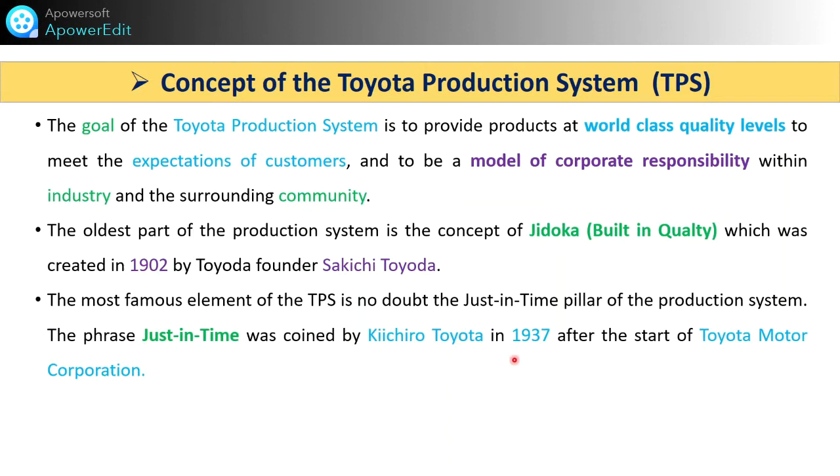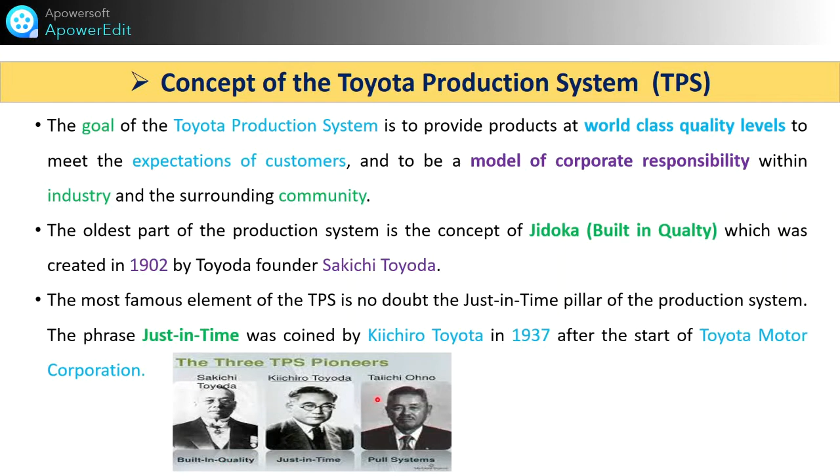The most famous element of TPS is no doubt the just-in-time pillar of the production system. The phrase just-in-time was coined by Kiichiro Toyoda in 1937 after the start of Toyota Motor Corporation. These are pictures of Sakichi Toyoda and Kiichiro Toyoda, who developed just-in-time, and built-in quality means Jidoka. And after that, Taiichi Ohno and the pull system. Hence, we'll learn the concept of TPS, the Toyota Production System.

This is the image of the house with 2 pillars. The 2 pillars are just-in-time and Jidoka. These are the main 2 pillars of TPS. What is the aim of these two? The goal is the highest quality, lowest cost and shortest lead time. In just-in-time, continuous flow, takt time and pull system, you must learn. Watch the videos on just-in-time.

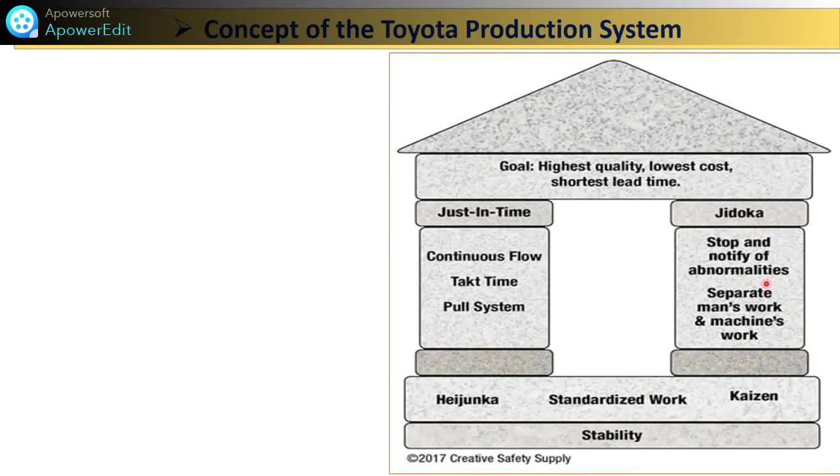Under Jidoka, stop and notify abnormalities, and separate man's work and machine work. So friends, here also are techniques like Kaizen, Heijunka, and standardized work that will give stability to your industry like Toyota.

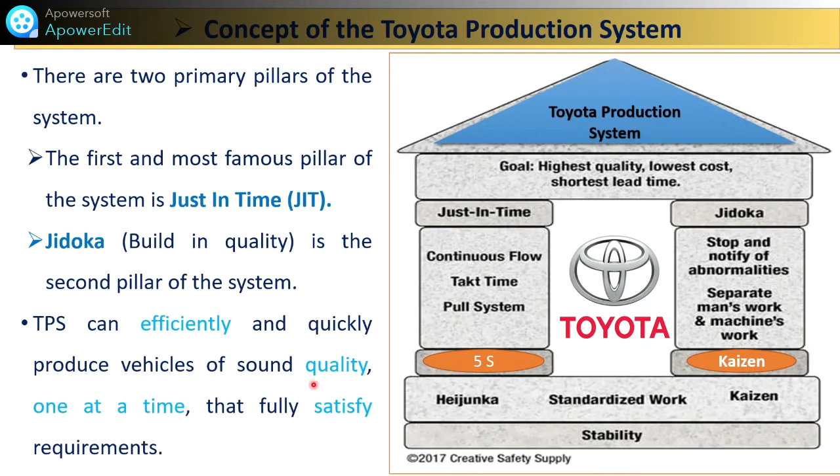So there are 2 primary pillars of the system. The first, most famous pillar of the system is just-in-time, JIT; Jidoka, built-in quality, is the second pillar. TPS can efficiently and quickly produce vehicles of sound quality one at a time that fully satisfy requirements. So we'll start with Jidoka.

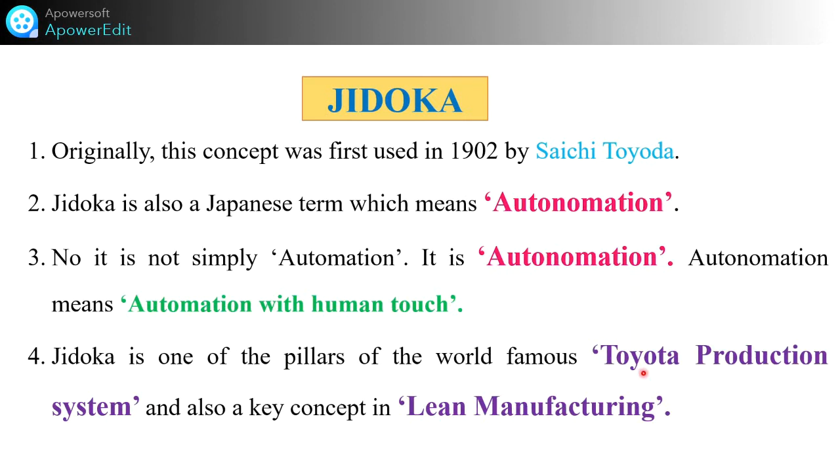Jidoka originally was used in 1902 by Sakichi Toyoda. Jidoka is a Japanese term which means autonomation. No, it is not simply automation. It means automation with a human touch, or automation with a human mind. Jidoka is one of the pillars of the world-famous Toyota Production System and also a key concept in lean manufacturing.

So friends, what is Jidoka? Toyota used this term to indicate that the system needs to be automated to highlight and attract attention to any deviation or defects originating in the production process. Thus, the machines were automated to identify and stop immediately when a defect or deviation occurs in the product or part of the product.

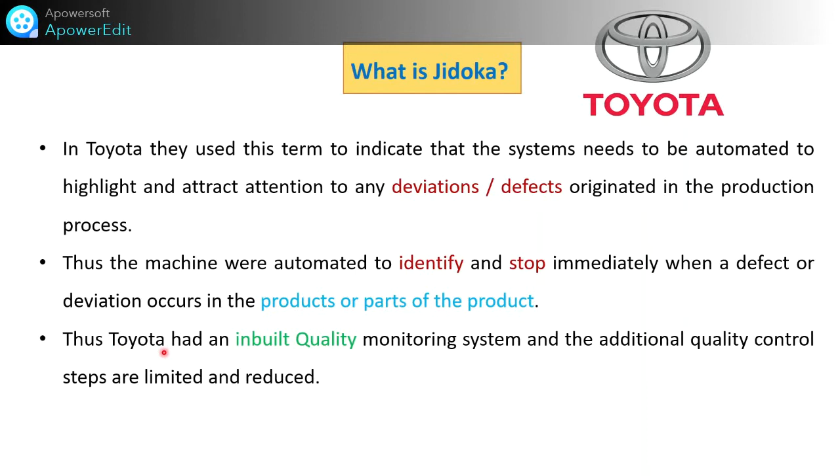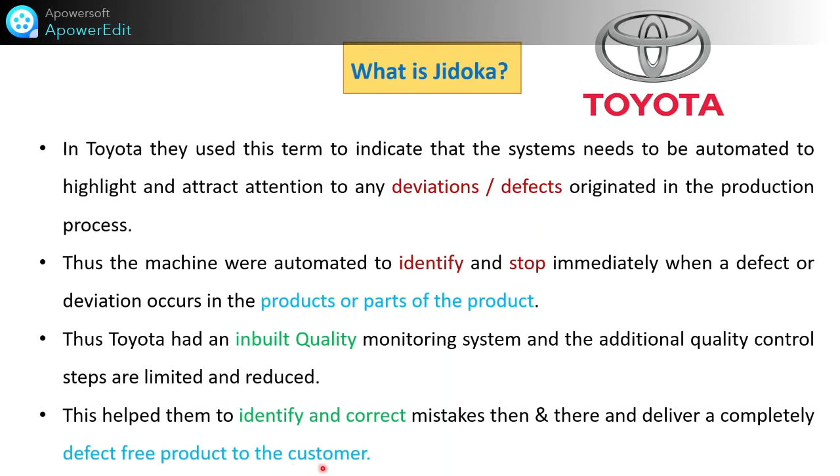Thus, Toyota had inbuilt quality, meaning monitoring the system, and additional quality control steps in between the process are limited and reduced. So this helps them to identify and correct mistakes then and there and deliver completely defect-free products to the customer. That is the main purpose they have achieved through this system. So Jidoka is one of the two pillars of TPS, along with just-in-time.

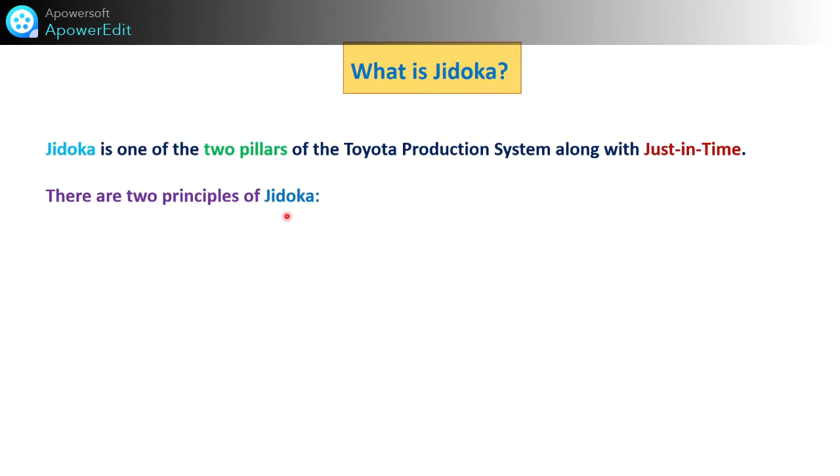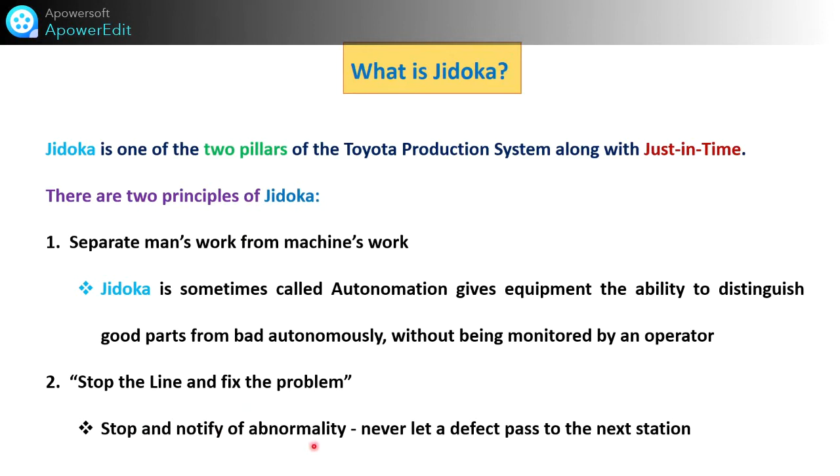There are two principles of Jidoka. The basic principle: separate man's work from machine work. Jidoka, sometimes called autonomation, gives equipment the ability to distinguish good parts and bad autonomously without being monitored by an operator. That is separating man's work from machine work. What will happen then? He will stop the line and fix the problem. Stop and notify abnormality. Never let the defect pass to the next station.

So there are four major steps for developing this type of Jidoka. First is minimize the manual labor. Manual labor simply means that all work is being done by hand. This makes sense only when the labor costs are cheap and/or the manual work can be done very quickly. That is not like this. We have to minimize the manual labor work.

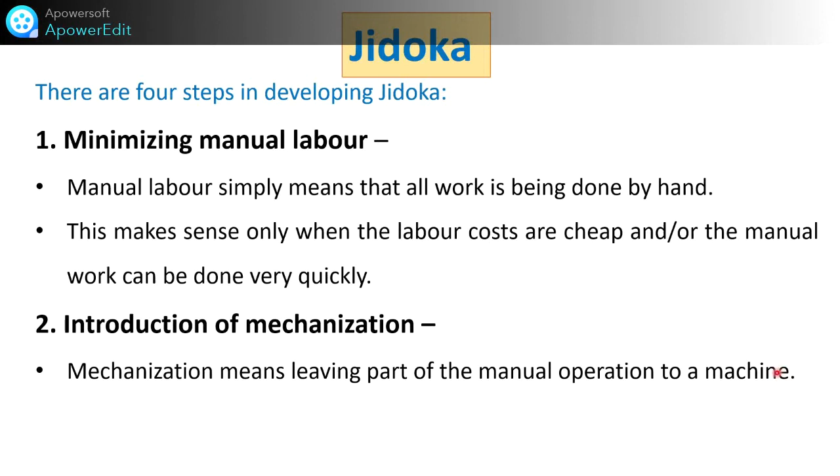After that, we have the introduction of mechanization. Mechanization means leaving part of the manual operation to a machine. The work is shared between operator and machine. So we have to introduce the mechanization.

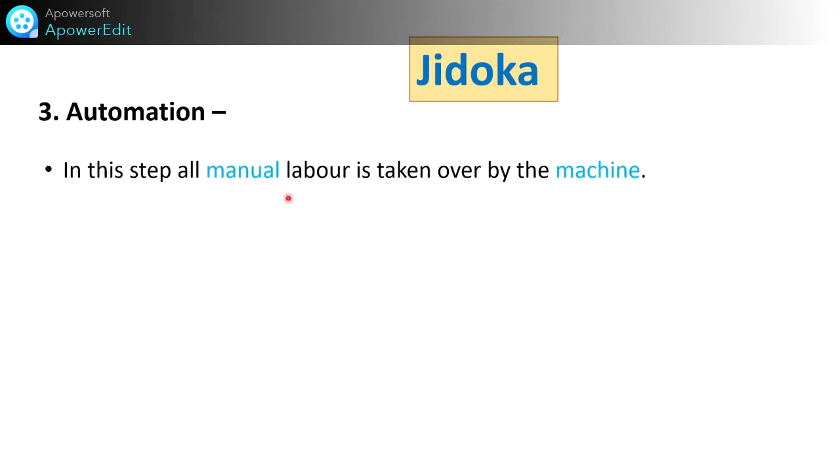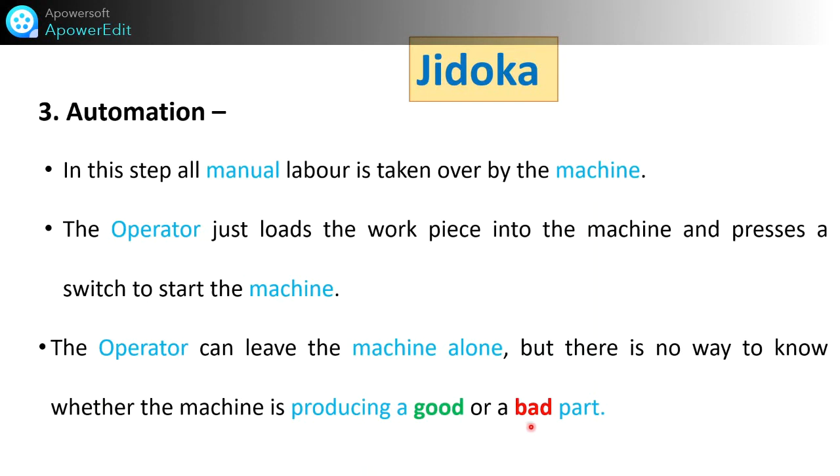The next step, third step, is automation. In this step, all manual labor is taken over by the machine. The operator just loads the workpiece into the machine and presses a switch to start the machine. The machine is started now. So the operator can leave the machine alone, but there is no way to know whether the machine is producing a good or a bad part. That is the problem. So to take over this problem, the fourth one: Jidoka, autonomation.

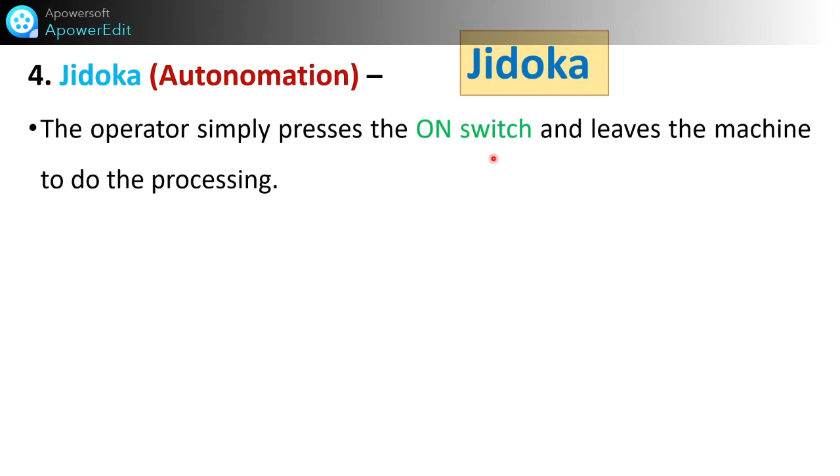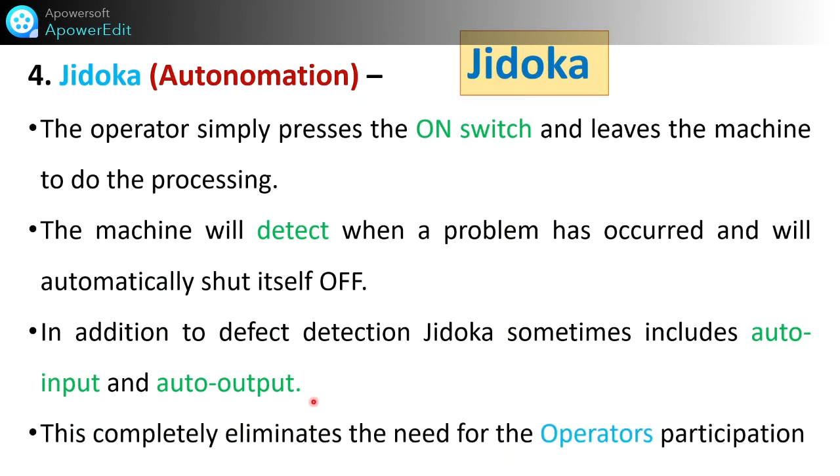Under this, the operator simply presses the on switch and leaves the machine to do the processing. The machine will detect when a problem has occurred and will automatically shut itself off when a defect or deviation in the product occurs. In addition to defect detection, Jidoka sometimes includes auto input and auto output also. So this completely eliminates the need for operator participation, and also increases the built-in quality.

So friends, what is Jidoka then? Jidoka is the automatic detection of problems or defects at an early stage, proceeding with the production only after resolving the problem at its root cause. So that is important in Jidoka. How it will happen, I'll show you with an example.

See these pictures. This is manual feeding by the operator to this machine. They are feeding this for the process. Then the next step is automation, mechanization. Here automatic feeding is there, input automatic, output automatic. The operator watches the machine cycle. But what will happen? It will not detect the defective parts.

So the next, last step, Jidoka. Automatic feeding is there, automatic output is there. After starting the machine, here is an andon light which will represent the defective part. If a defective part occurs, the light will glow. So we have to develop self-monitoring machines to increase the productivity also.

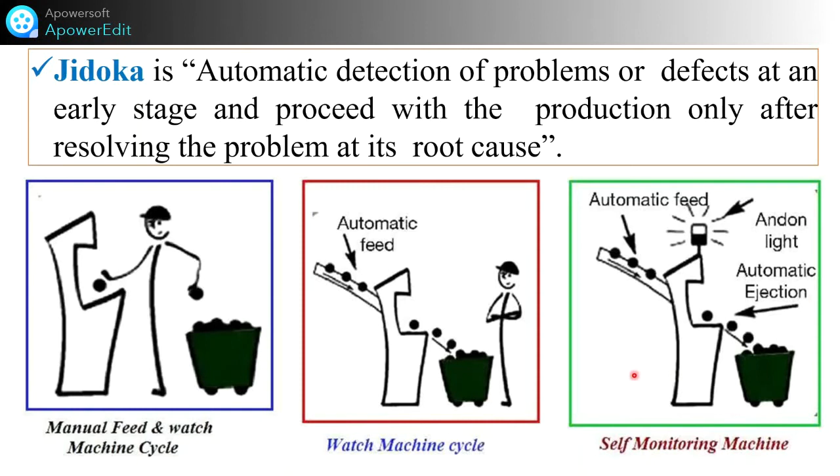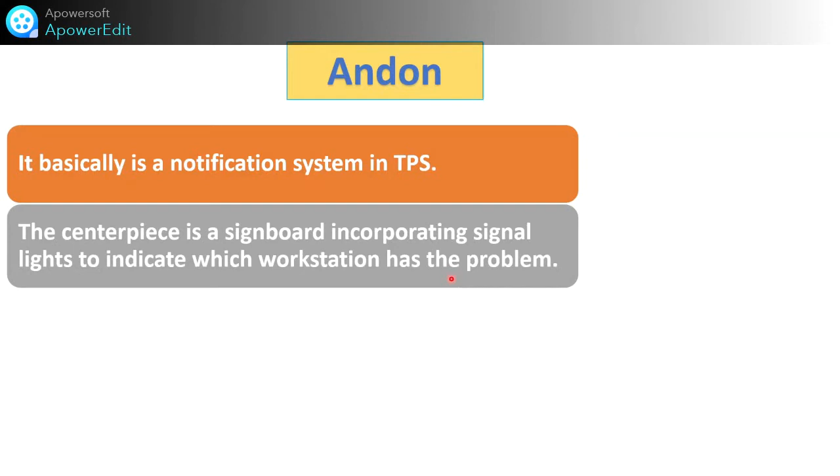So friends, here you heard the word andon. It is basically a notification system in TPS. The centerpiece is a signboard incorporating signal lights to indicate which workstation has a problem. Any problem in the workstation, or a defective part, is also represented by andon. So this is the picture of the andon.

You can stop the process manually. The alert can be activated manually by a worker using the pull cord or the button, or may be activated automatically by the production equipment itself. See, this is the use in industry, a picture of industry, and it was based on the pull system, where the problem can be notified as it happens, and then it can be corrected immediately.

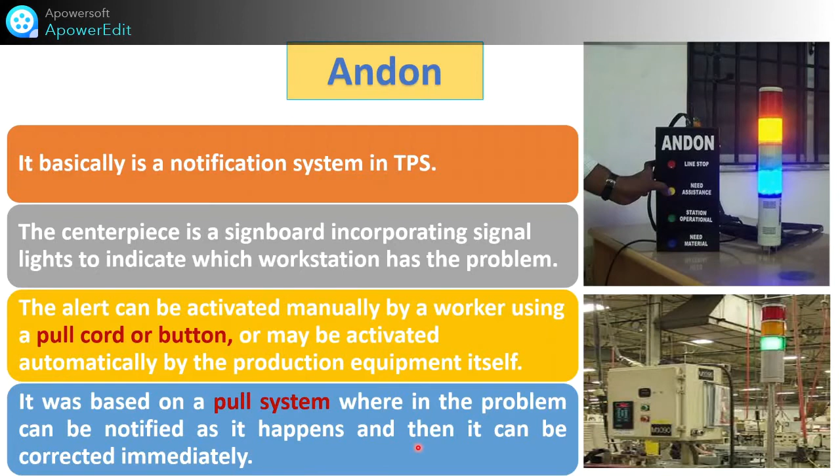Friends, reflection spot for this. Just pause the video for 5 minutes and try to write the answer, what you understood from the previous part of the video. Write down what you understood on one plain paper. Pause for 5 minutes. Okay friends, now we can play the next part of the video.

The remaining part is a very interesting part. Here, Jidoka using state-of-the-art AI. Artificial intelligence nowadays is an emerging trend, and you have a bright future opportunity in this trend also. So the Jidoka software platform and hardware platform developed by this company: they form one software platform called Kompass, and that Kompass is used to do all the records. The reference has been taken from this website. You can also go through the website.

Real-time decision making leveraging state-of-the-art AI, live monitoring of all the images, an E2E system for visual defect inspection. I will give you details in a coming video. Quality reports develop automatically, customized to organization needs, with downstream and upstream integration of applications such as ERP and other IoT platforms. You can also connect, with cutting-edge analytics and seamless integration with the hardware elements.

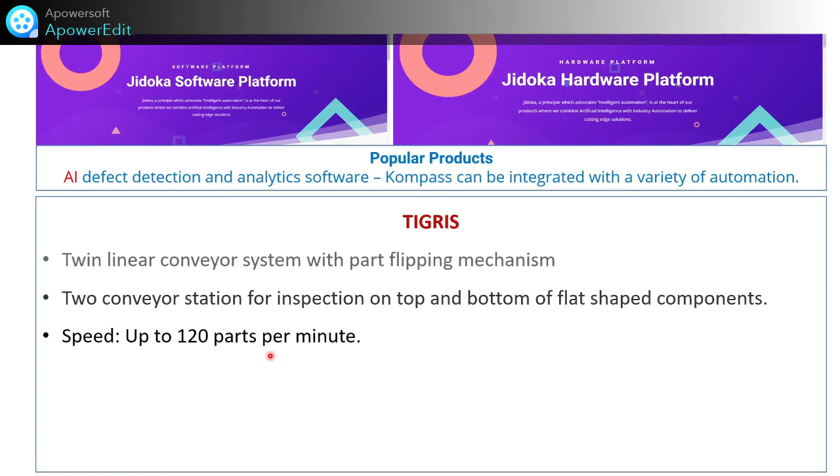How will it work? It works with a twin linear conveyor system with a part flipping mechanism for the product. Two conveyor stations for inspection on top and bottom, and flat-shaped components also. The speed is up to 120 parts per minute for one machine. The size of the machine is 1.6 meter length, 0.75 meter width, 1.8 meter height.

The number of cameras is 2 to 6 depending on the component's geometry and regions for inspection. Tigris can be integrated with any part feeding automation such as a bowl feeder.

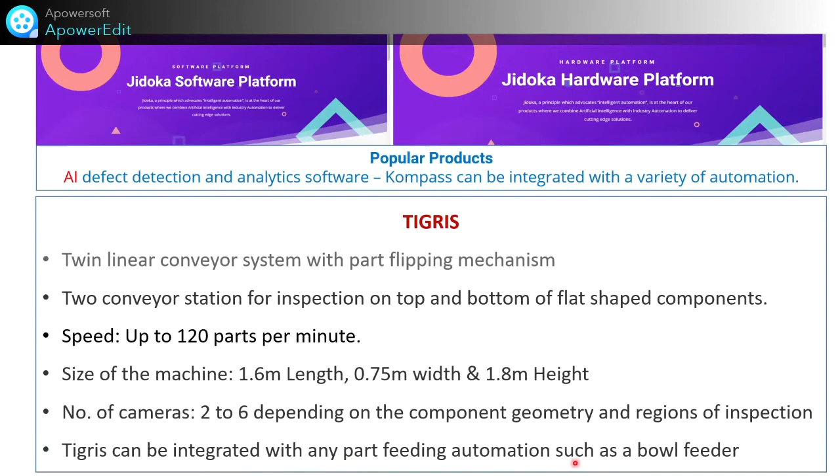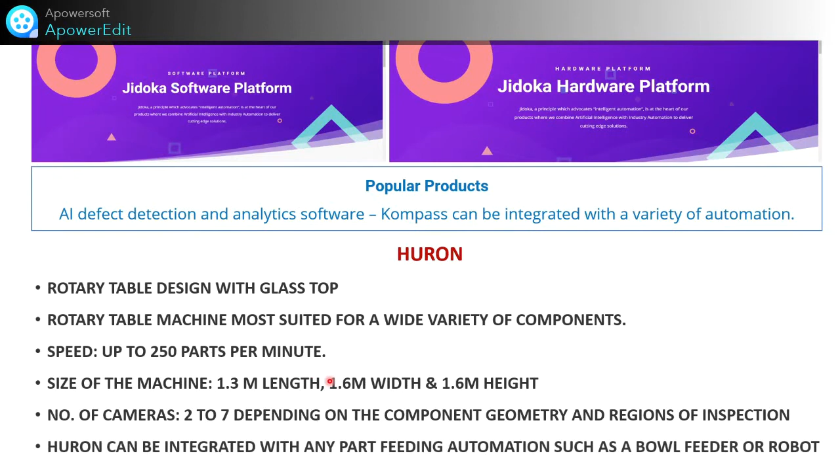See, one other product for AI, Huron. Huron is a rotary table designed with a glass top. The rotary table machine is most suited for a wide variety of components. And here the speed is given to you, size, number of cameras. Huron can be integrated with any part feeding automation such as a bowl feeder or robot. See, we'll watch this video to clear your idea.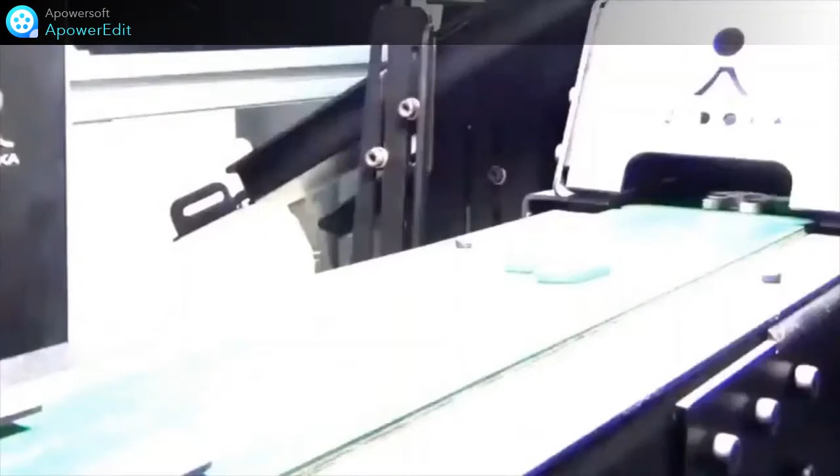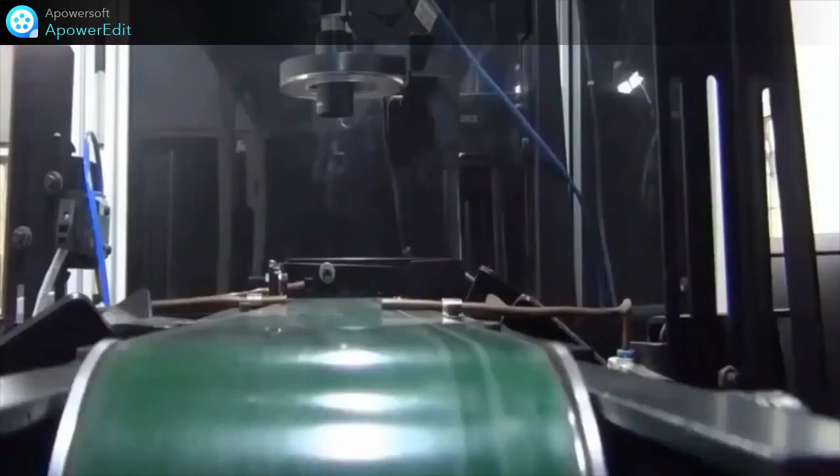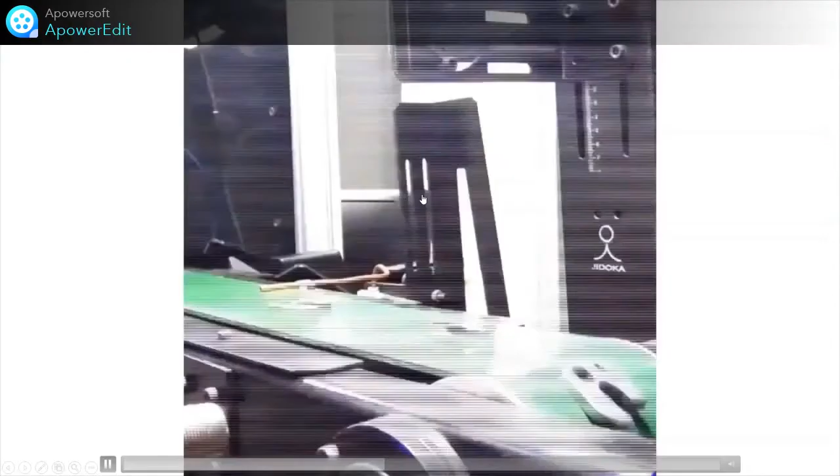See, these are the products which are kept on; it is now started. Watch carefully. The flashlight which will take the pictures of products with high image processing cameras, and it will go to the next process. This conveyor belt with parts is again flipped onto another conveyor. These two conveyors are there. Here are the image taking cameras, and the parts are going. The AI-based model gives the decision as okay or not okay.

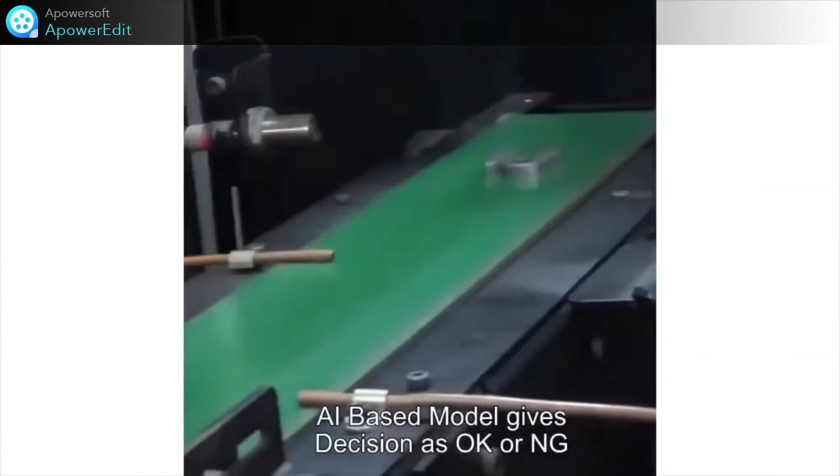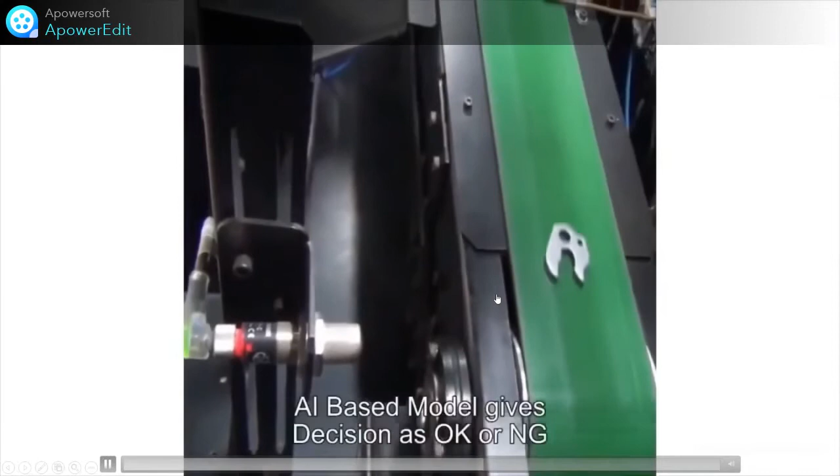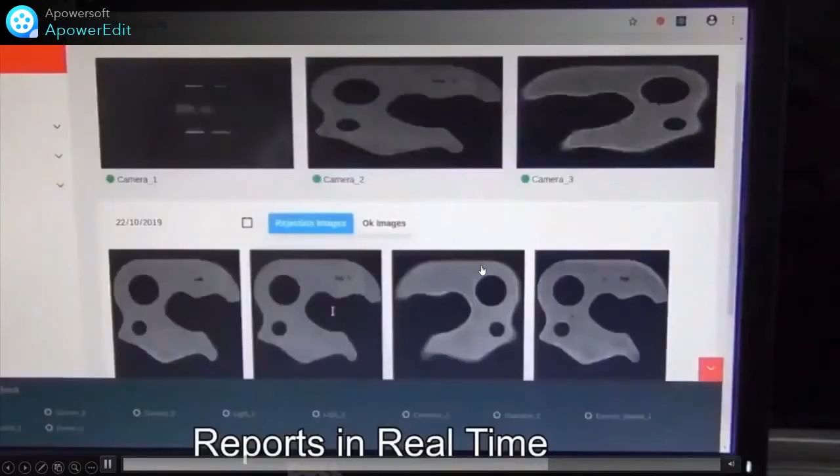This is what Jidoka developed. Rejected part and okay part. If a part is okay, it will be separated here. If a part is defective, automatically it will check it. You can watch clearly. This part is okay. See here, this is the defective part, and automatically it will give all the records and details, with the image of what the defects are. Here you can also watch the defects by these images.

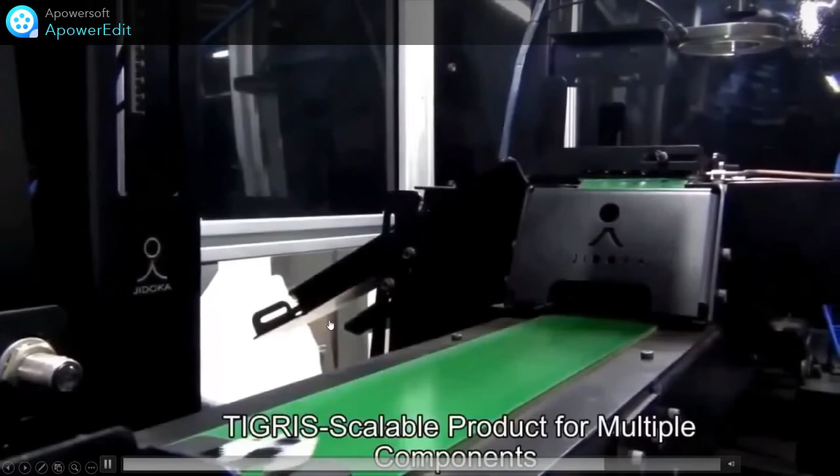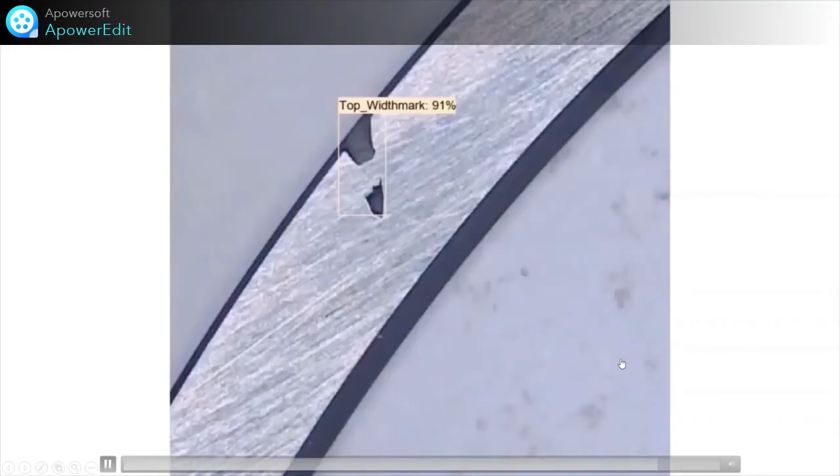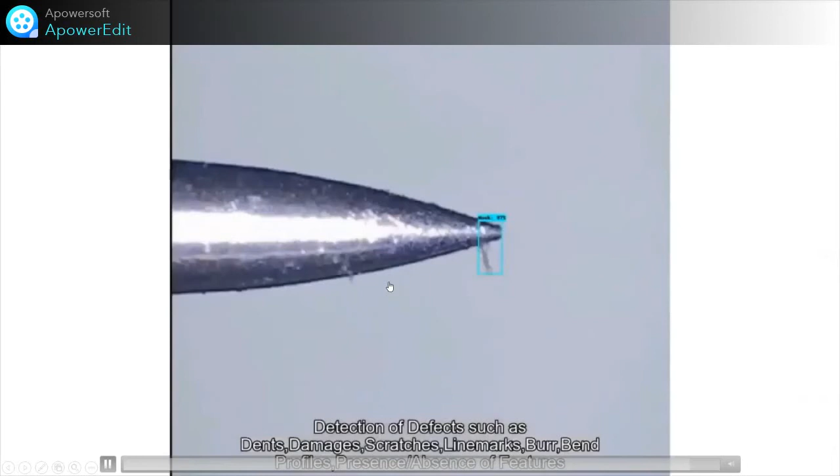It automatically gives all the details shift-wise and day-wise for products of multiple components. See, these are very different products going through this conveyor. This product will also do its work for detection. This defective part is detected by this camera and it is rejected. It is not necessary to stop the production. This is a new technology they have developed, and this is a new opportunity to all friends.

This is one of the popular products, Miyake. Miyake is another stand-alone inspection station with manual loading and unloading. Automated inspection, counting and decision with manual loading and unloading of components in front of the camera. What will it do? It will detect how many parts, 60 parts per minute, with 1 to 3 cameras depending on the component geometry and regions for inspection. An ideal machine for complex surface inspection and part counting applications where man fatigue is more in the inspection process rather than loading and unloading. The loading and unloading is easy, but counting, see how it is possible. I will show you.

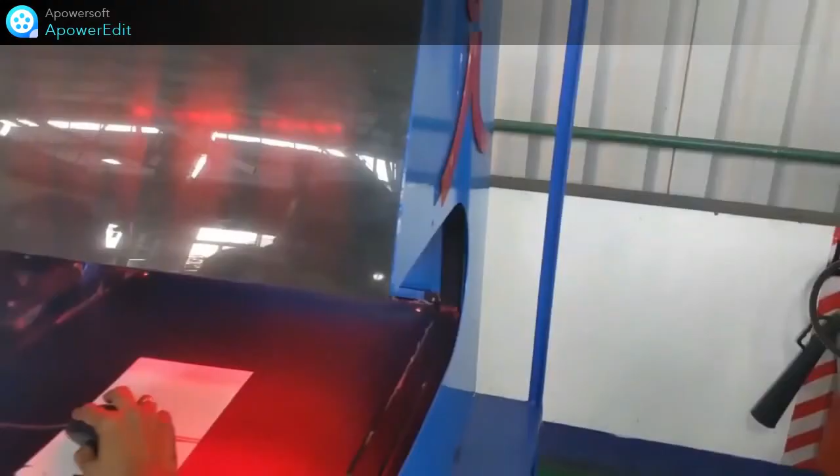This is one good video introducing the ERP. This is the software Compass, the product from Jidoka Technologies. Miyake can be used for automation of any visual quality or visual counting inspection. See, here counting inspection is done. Batch number, chip number, all details, who the operator is, all loaded, and all these piston rings of different types, colors, and sizes can be counted in Miyake.

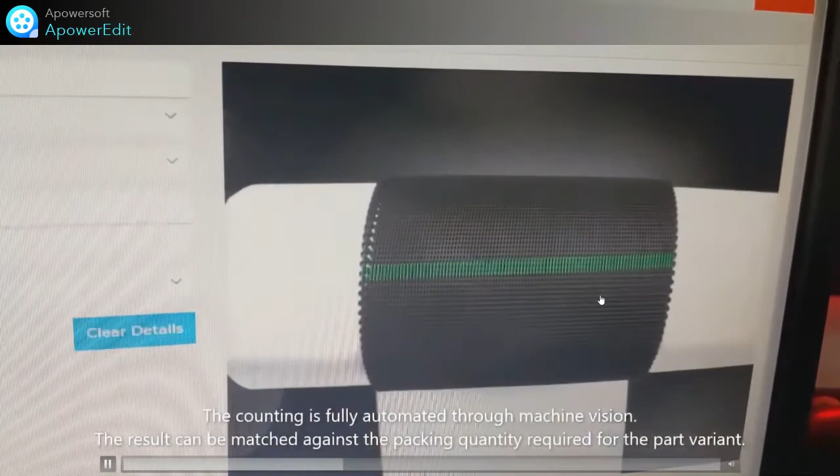This is a very costly product. The counting will be done within a few seconds. Here the image is taken and automatically the result will be here, 100 numbers. Individual manual counting is very difficult. Remove these few piston rings; again it is checking for demo purpose, showing you how the counting will be. 95. 5 are removed. Automatically it will display and keep records simultaneously.

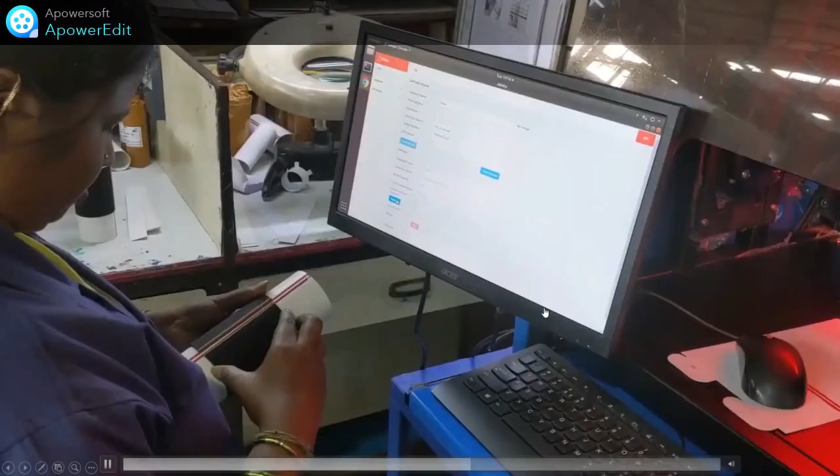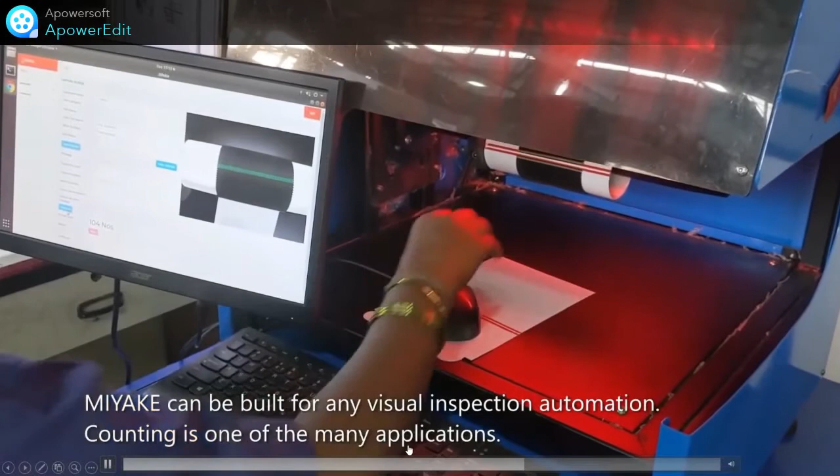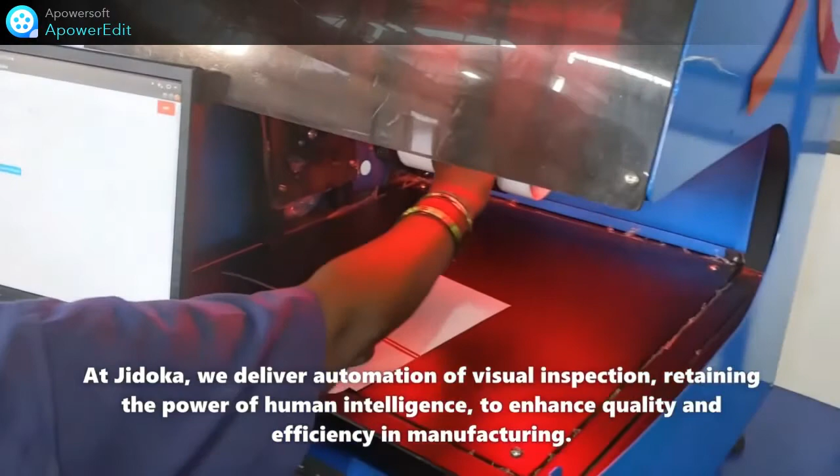Any operator, by being given the training, can build this type of work for any visual inspection automation. Counting is one of the many applications. So we can visualize their quality also. Jidoka delivers automated visual inspection, retaining the power of human intelligence to enhance quality and efficiency in manufacturing.

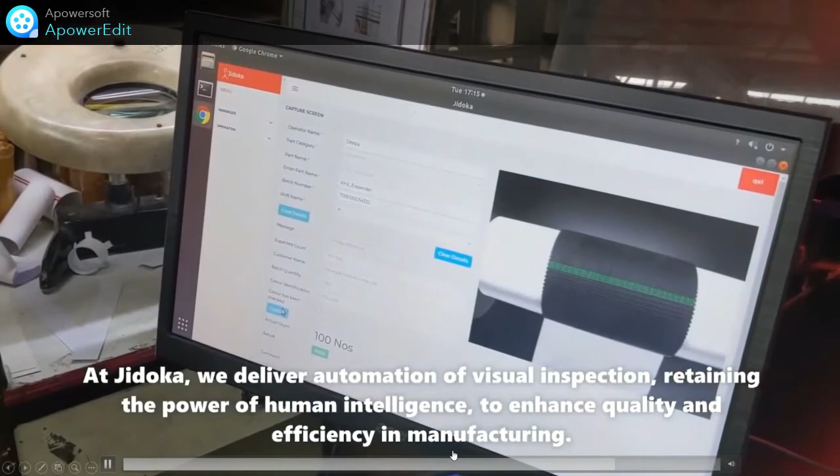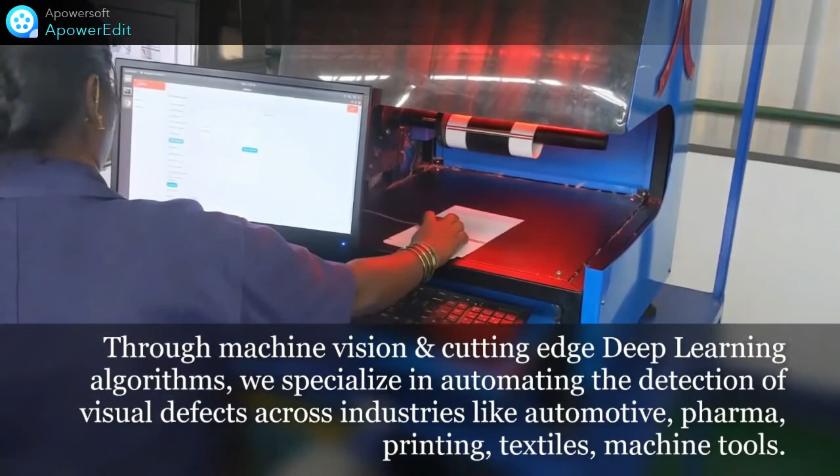So friends, these are the new opportunities for you. Please gain more technical knowledge related to vision, deep learning, algorithms, and visual defects using AI. You must know these various industries where it will be useful: automotive, pharma. So this is the discovery by Jidoka. You can visit the website also. We will go to the next slides. So friends, there are a number of opportunities open to you, like business development, data science, industrial automation, computer vision. So you have to develop yourself and upgrade your skills.

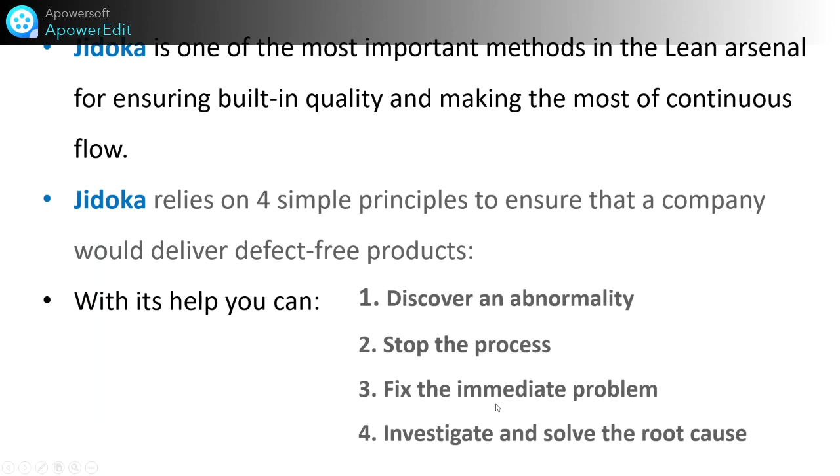So Jidoka is one of the most important methods in the lean arsenal for ensuring built-in quality and making continuous flow. Jidoka relies on 4 simple principles to ensure that a company delivers defect-free products: discover any abnormality, stop the process, fix the immediate problem, and investigate and solve the root cause. Friends, at the end of this video, what are your outcomes? Key takeaways, you have to write down.